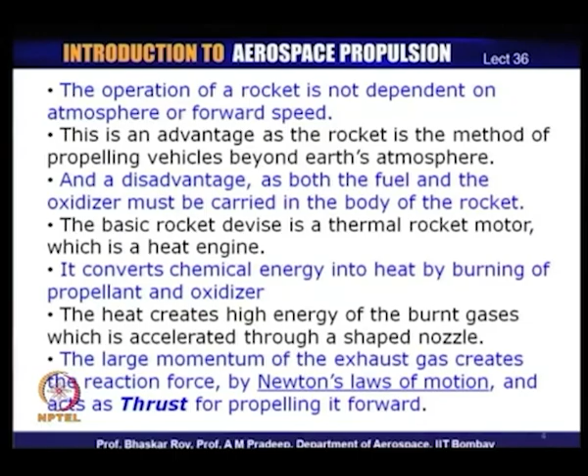And if you create enough energy and if you have a properly shaped nozzle, then the large momentum of the exhaust gas, when it comes out of the nozzle body, by the reaction force as per Newton's laws of motion, creates thrust. So, thrust is created through various physics. First is release of heat, second is expansion or acceleration of the gas through a properly designed nozzle. And if you do that properly, the exhaust gas then gives a reaction, Newton's laws of motion apply, and you have thrust created by this exhaust gas.

This thrust is what we use for propelling the rocket, first through the atmosphere, as it has to be launched from Earth's surface, and then through rarefied medium outside the atmosphere, and then out into space where there is no atmosphere at all. So, this is the basic mechanism by which a rocket normally works. We will take a look at some of the more famous rockets that have been used in the recent past.

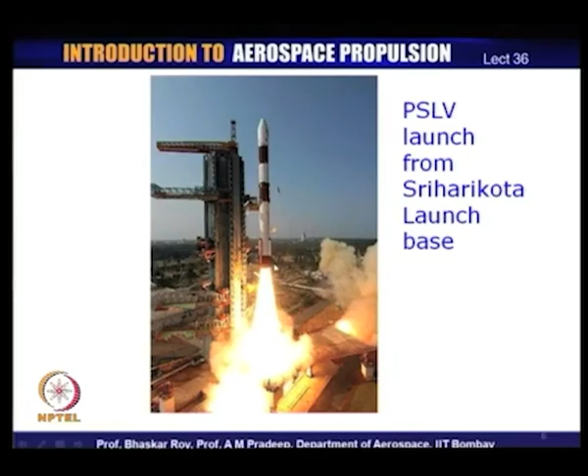So, the thrust that it creates has to completely balance the weight of the entire rocket body, and hence it is quite often known as lift off. It lifts the entire rocket from the launch base up in the atmosphere.

So, some of these would actually fall off after the whole rocket has gone to a very high altitude, and then the so called second stage will take over, and then after a certain while the second stage will also fall off, and then the third stage will take over, and after some time even the third stage would fall off, leaving only the payload, which is the main satellite, to go on to its orbit or go on to its mission.

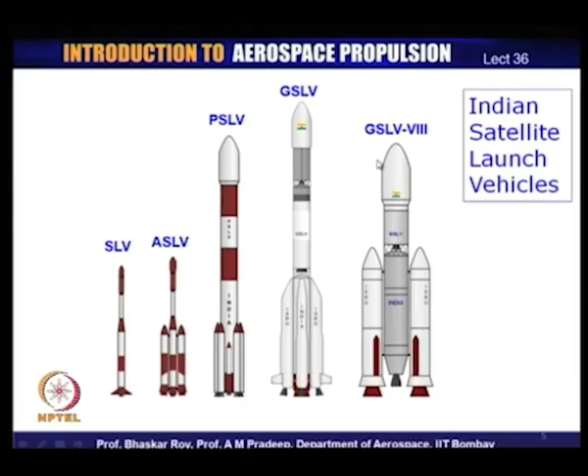We can see that in our Indian rockets also, it has a number of stages. This is the first stage, this is the second stage, this is the third stage. Sometimes you have 4 stages, this could actually be a 4th stage, and then you have the payload on top of it, which is the satellite. So, this is called satellite launch vehicle. So, the whole of it is the launch vehicle, on tip of it is the satellite, which is used for various purposes. So, people have been using these for various purposes.

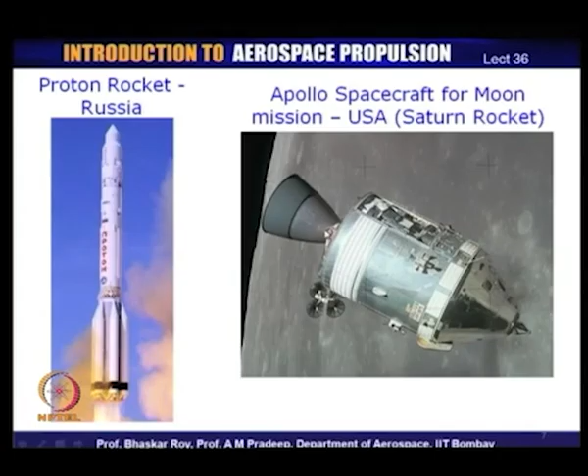US has used it to send man to the moon. Russians have also done that, and they also send various satellites to the orbit for various purposes, just like our Indian program.

and then once it is high up in the altitude, actually somewhat outside the Earth's atmosphere, the space shuttle gets released from the main rocket body, and then it can go around the Earth's orbit on its own. As I mentioned, the shape in that kind of orbit does not matter. It could be shaped like an aircraft, or it could be shaped like anything, and it would still go around the Earth's orbit, as there is no air resistance involved.

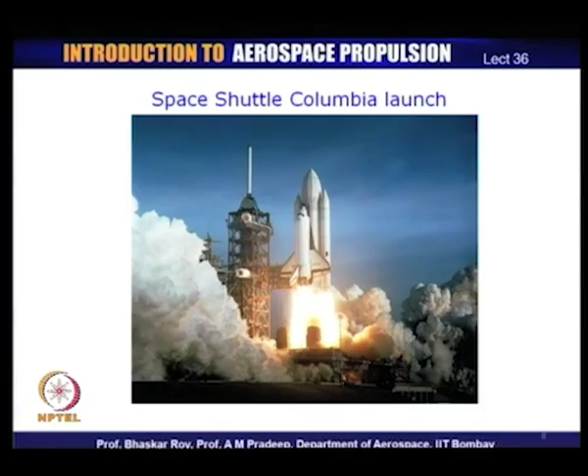So, it actually does so. It actually lands on a runway just like an aircraft does after it has gone around the Earth in space. So, that is why it is called a space shuttle, because it comes back and it is reusable. It can be launched again with the help of another rocket.

Let us look at various kinds of missiles. Missiles are typically used for various military purposes, and hence some of their configurations may be guarded secrets, but we can take a look at all kinds of missiles that are normally used, and each of them is designed for a particular purpose. Now, missiles are used for certain targets. So, you have a certain target to which the missile is launched, and it has to hit that target.

Now, it could be an air to air missile, which means it is launched from air, maybe from an aircraft, and it is to hit another target which is also in air, could be another aircraft. It could be an air to surface missile, which means it is launched from an aircraft, and it is to hit something on the surface of the earth.

It could be an anti-ballistic missile, which means, we will see the ballistic missiles, and this missile is supposed to go and hit that ballistic missile. So, to counter a ballistic missile, hence it is called anti-ballistic missile. So, it has to intercept a missile while that missile is moving in the atmosphere, intercept the missile and hit that missile. So, it has a purpose of hitting something in motion in the Earth's atmosphere.

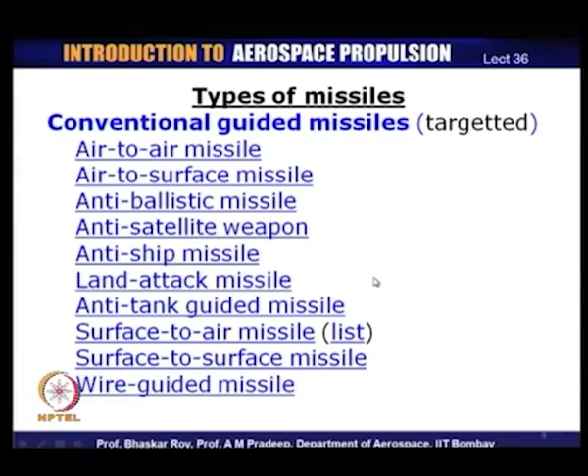And then of course, the surface to surface missile, which is the original missile. So, send a missile from one point of earth to another point of earth for some target. And we could have wire guided missile, where the guidance system is wired, and these are missiles which are used for various kinds of purposes. The purpose is normally some military purpose.

Cruise missiles normally have a long cruise flight, very much like an aircraft. That means it sort of flies at a constant altitude for a large part of its flight. Most of the missiles actually have parabolic or some arced curved trajectory, which actually means that it does not cruise, but this cruise missile is one of a kind which cruises for a long time in its path, which could be hundreds of kilometers, and then lands at a particular predetermined place at a target. So, that is why they are called cruise missiles. They are designed to cruise at a constant altitude over a long period of its actual flight.

Now, the ballistic missiles are the aim and shoot kind of missiles, which are used again for various military purposes, and the purpose is built into the nomenclature or name of these missiles. They are called tactical ballistic missiles, the short range ballistic missiles, theater ballistic missiles used in specific kind of war situations, could be on the top of a mountain or in a very difficult terrain. So, those are called theater ballistic missiles.

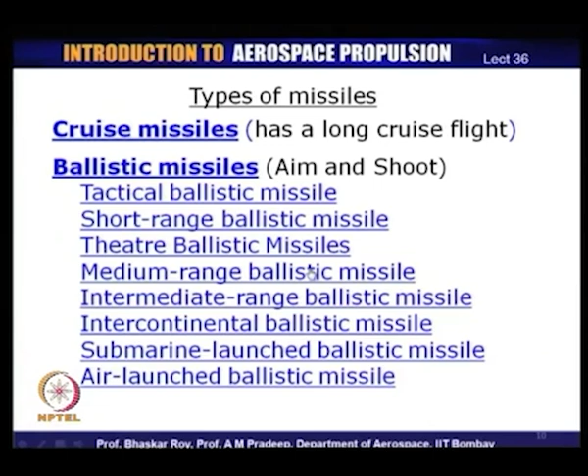So, these are the various kinds of missiles, and as you can see, they are named after the particular mission for which they are designed, and these are all various kinds of rockets. So, they are all covered by the rocket science that we will be talking about, but each of these rockets is designed for a particular mission. So, the way you design them, the way you design the nozzle, its guidance system, everything finally makes a particular kind of missile, and as a result of which they have been given various kinds of nomenclature.

This is an old German V2 missile. The reason I am showing this old missile is because most of the other missiles are guarded secrets. They are secret technology, which are normally not available to the general public, and hence we can look at a somewhat older missile, which was actually used during World War II.

And as you can see here, the missile houses a number of components. Right on top, you have the unit that is often called payload, or in simple rocket terms we call it payload, but in case of a military application it would be called a warhead. And then you have the various control systems, which control the craft and finally, the warhead onto the target. So, this is the control or gyro control, as it used to be known earlier, which guides the warhead or the payload onto the target.

And then you have various other systems, the radio system and so on, which are housed over here for it to be communicated with the ground system, so that the ground control can be operated to guide this system onto its target. The various other systems are there. The rocket body, as you can see here, houses all the other systems. You have the liquid oxygen that is stored over here, and you have the hydrogen peroxide tank, which is stored over here, and then you have the nozzle, which is at the end through which the high velocity jet finally comes out and creates the thrust.

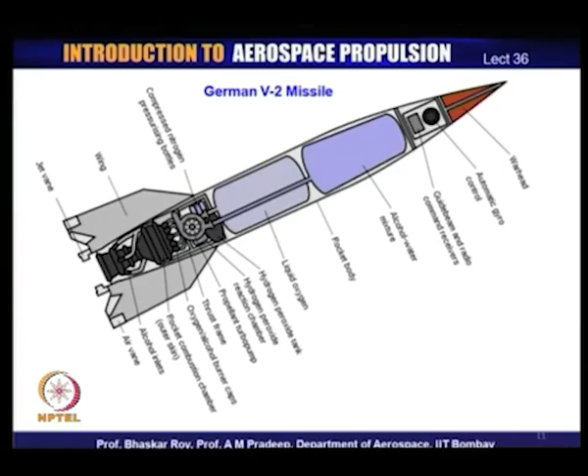Let us try to take a look at the various fundamental sciences that are contributory to the operation of rocket. Now, if we look at the fundamental physics of what is happening, you have a rocket chamber, which is often called a combustion chamber, in which the combustion is initiated, and we shall see what all kinds of combustion is done in a few minutes.

What it creates is a very strong pressure field inside the combustion chamber, and then this high pressure gas is released, and it continues to create this pressure field before it goes out through the nozzle. And when it goes out, of course, it creates the thrust. Now, this pressure field, as it is seen inside the whole rocket chamber, if you consider the nozzle and combustion chamber together, they may be called the rocket chamber, and this pressure field inside the rocket chamber is acting on the inner surface of the entire rocket chamber.

On the outer surface, you have an external pressure field, which may be the Earth's atmosphere, or it may be no pressure field. That means, there may not be any atmosphere at all, and the differential of the two, when integrated, actually gives you the net thrust. So, this pressure field integrated over the entire area would finally give you the net thrust in this direction, that is in the direction which is the axis of the rocket chamber.

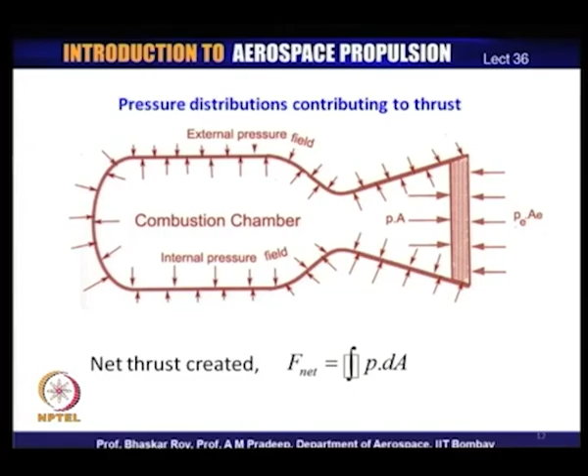If you consider this chamber to be an axisymmetric body, the radial components of this pressure field would actually nullify all around. That means, they counter each other, and there is no net component acting in any direction, as we are looking at an axisymmetric body. And hence, the only component that would be active is the horizontal component, or the component parallel to the axis of this craft or this rocket chamber, and that net component is the thrust. So, this is how one can say that the thrust is created. So, this is one of the methods by which you can use the basic physics to understand how the thrust is created.

Let us look at how the basic heat engine is conceived. Now, we have looked at various kinds of jet engines, the jet engine cycles you have done, and the jet engine cycle works in a cycle. It comes from atmosphere, goes through compression, goes through the process of combustion and expansion, and finally, gets released into the atmosphere. So, it acts in a cycle.

In a rocket, we do not have Earth's atmosphere, we do not have air, which means that the working medium has to start on its own, come out through a process of combustion, and then come out through a process of expansion, and there is no return path, there is no cycle. So, at best one can say it works in a half cycle, but we are not using a medium which goes back to its origin.

So, it works through a process of combustion, which is approximately a constant pressure process, and then comes out through a process of expansion. So, even though a jet engine or a rocket, which is also a jet engine, work as heat engines, there is some difference in the way they are fundamentally conceived as working heat engines. And this is the fundamental difference, that the other air breathing jet engines work in a cycle, the rockets do not work in a cycle.

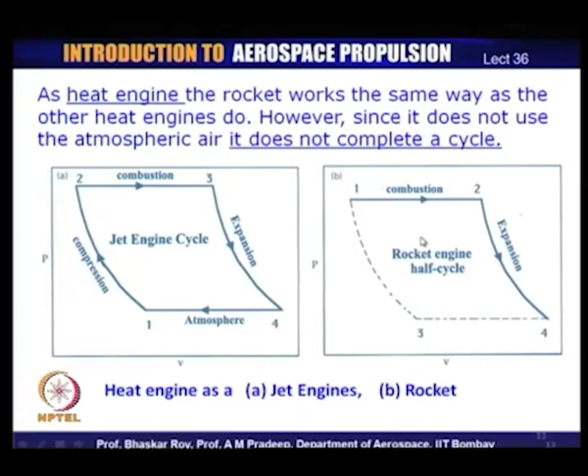Now, a rocket actually fundamentally right from the beginning has two basic kinds of fuel and oxidizer system. One in which the fuel and oxidizer both are liquid, and hence they need to be separately pumped into the rocket motor or rocket combustion chamber. So, you need a pumping unit for each of them separately to be pumped into the combustion chamber, and both of them are liquids. The other variety is where both of them are solid, and both of them could be separate bodies of solids, or quite often they are mixtures.

So, solids are mixtures, and these mixtures have been used for many centuries now by the Chinese and our Indians for creating rockets. And so, the early rockets that we know of were all solid rockets, what we call today solid propellant rockets, and those were the rockets which were used by the Chinese and the Indians and many other people around the earth in the ancient era.

In the modern era, these solid bodies are designed. They are various designer shapes, which we shall look at later on in one of the next lectures, and we shall see how those shapes actually contribute to the performance of these solid rockets. And in both the cases, once the fuel and the oxidizer are burned, the mixture of gases that is created is released through the nozzles for thrust creation.

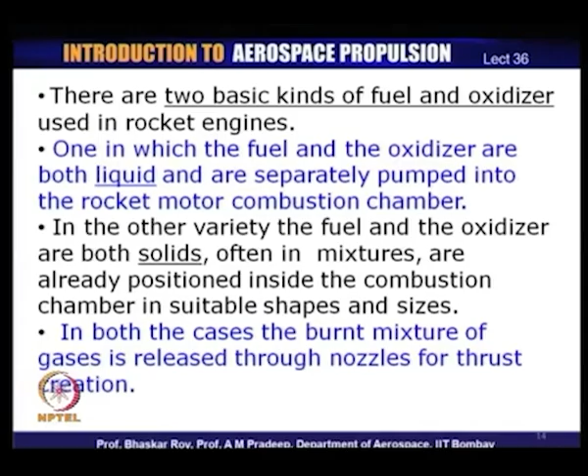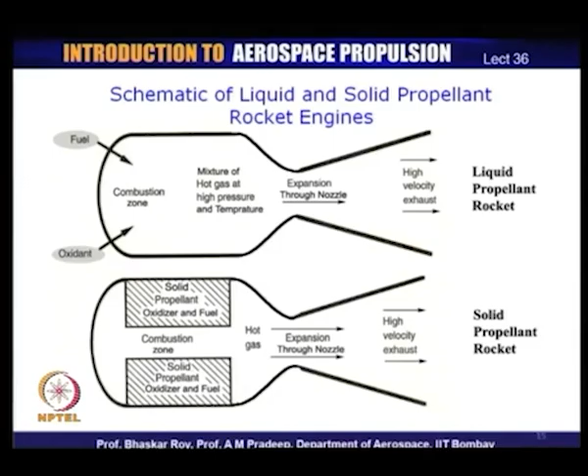Some of the bigger missiles, like intercontinental missiles, could have a combination of liquid and solid, which could be multi-stage. So, the first stage could be liquid to carry the total weight of the entire rocket body or the vehicle body, and then later on, once the first stage is released, the next stages could be solid rockets, which are a little smaller in size, and hence they can carry the vehicle much farther into the atmosphere or beyond the atmosphere. So, combinations of liquid and solid rockets have also been used for various kinds of launch vehicles.

Now, let us take a look at basic rocket science, how the thrust is generated. You see, rocket science is based on a very simple principle actually. You know Newton's laws of motion. You know that if you create a large gas energy that is coming out of a body, it will immediately give you a forward motion. It can be done on a very small scale in your laboratory. If you open the end of a balloon and release it, the balloon will move much like the rocket movement.

So, basically release of the gas will always tend to give you a certain amount of motion, and then in typical modern rockets the motion needs to be controlled. So, you have a guidance system, you have a navigation system. All those systems are housed in the body of the rocket. However, the main problem of the rocket is creation of the thrust. So, much of the body of the rocket is actually used in storing the fuels, managing the fuels, and then of course, managing the combustion process and then releasing it through the nozzles.

So, the basic rocket engine is more about its heat engine and less about the craft, which is basically a cylindrically shaped body, at the tip of which you have a payload which goes out for various motions. So, the various purposes of the rocket are served by basic fundamental science. Let us take a look at this fundamental science, which governs all kinds of rockets, missiles and various kinds of satellite launch vehicles.

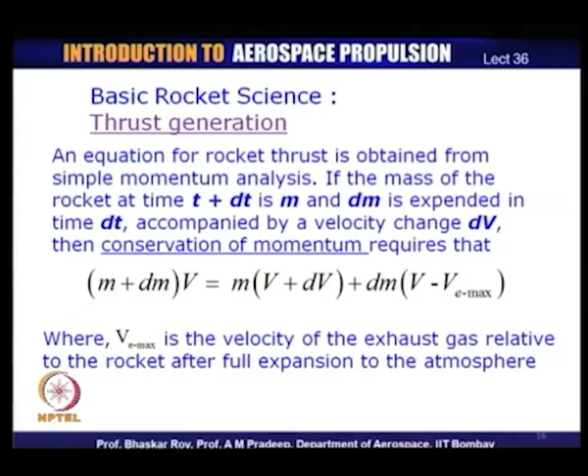Now, if you slightly work on that equation, it devolves into a much simpler form, which can be differentiated to give you a very simple equation, m dv/dt equal to V e max into dm/dt. Now, m dv/dt is the propulsive force or thrust, which is m into acceleration. dv/dt is of course the acceleration. So, that gives you the propulsive force or the thrust that you require for this body to be moved, and that is the thrust you need to create.

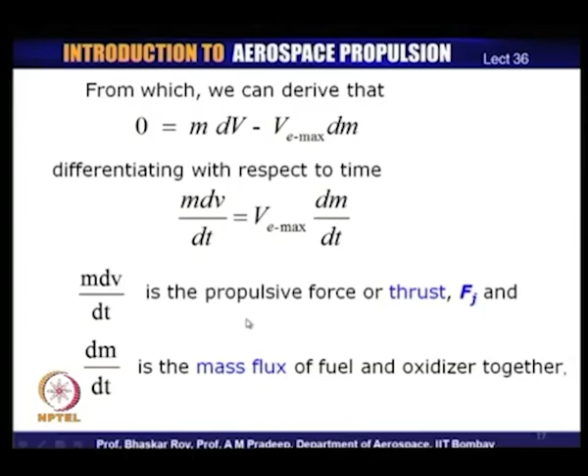Now, dm/dt is the mass flux of the fuel and oxidizer together. You remember, the rocket carries the fuel and oxidizer and there is no air available. So, this is what is coming out of the rocket body, and this is the thrust you need to create to move the entire rocket body through the atmosphere or anywhere else. So, this comes out of the basic motion of the rocket body.

So, the jet thrust that you need to create can also be written in terms of V e max, with which the fuel and oxidant together, the jet, are coming out, and the mass flux of the fuel and oxidizer together, and that gives you the thrust. So, this thrust must be equal to the thrust required for the motion of the body, as a result of which you have a properly matched engine and rocket body. Now, this exhaust velocity which we call V e max, at the moment we are assuming that maximum velocity has been created.

It is worked in an ideal condition, the nozzle is working as an ideal nozzle, and then it is expanding into the atmosphere in a complete expansion process, and that creates V e max. We shall see later on that the rocket does not create V e max all the time. It creates a velocity V e, which is not necessarily maximum at all times of its operation.

Now, this V e max depends on the design of the exhaust nozzle and on the local ambient condition of the flight. So, in a well designed convergent divergent nozzle, the exhaust velocity can be calculated and is known. For flights within the atmosphere, they can be calculated quite easily, reasonably approximately for all engineering approximations.

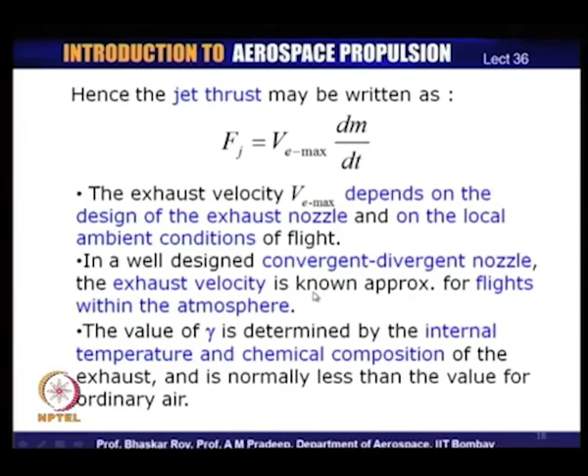And the value of gamma is determined for the mass of the gas with the help of the internal temperature and chemical composition of the exhaust. And it is normally much less than the value that is used for ordinary air, normally quite less really at high temperature and pressure. Now, these are the equations with which you can calculate the V E. As I said, the value of V E can be easily calculated.

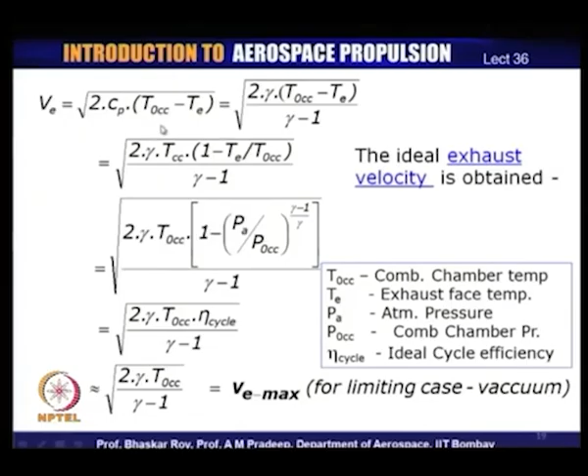And if you do that, you get the V E max, which is for the limiting case, that is in vacuum. So, this is what you get when the rocket actually flies in vacuum, that is well outside the Earth's atmosphere. Otherwise, in atmosphere you can calculate by the earlier steps that are shown over here.

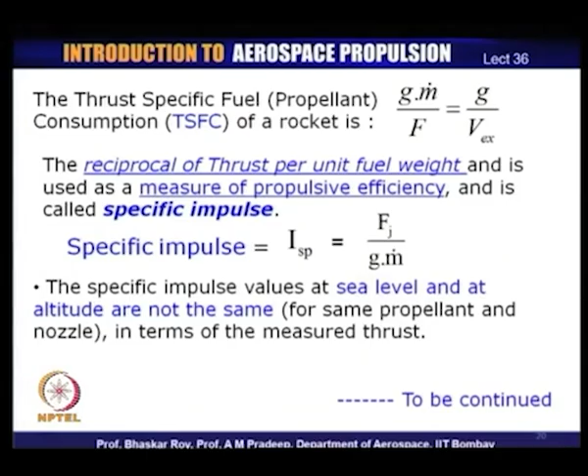And hence, these are the various parameters that typically specify a rocket and a rocket's operation: the TSFC, the specific impulse, and the exit velocity.

We shall continue with this in the next class, and we shall introduce a number of other parameters that typify a rocket and its operation, and also quantify how good the rocket is and what this engine could be used for, whether it could be used for a missile, a satellite, or any other purpose, which can be found out from these parameters. We shall be introduced to a number of other parameters pertaining to basic rocket science in the next lecture.